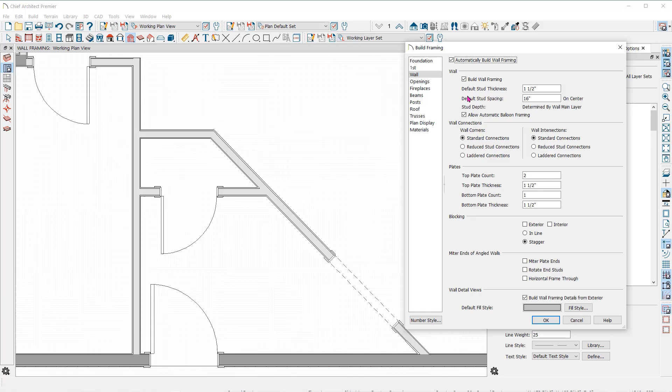I'll go ahead and click OK here, and you can see that Chief Architect has automatically framed all of my walls with preset defaults for how they are framed. But let's go back into the Build Framing tool. Notice here, when I hover over the tool in the toolbar, you will see Control-Shift-S in the parentheses. That indicates the hotkey that is set up for using the tool without having to go to the toolbar. I will be using this hotkey from now on instead of the tool in the toolbar to open the Build Framing dialog.

You have several choices here that control how each of the corners and intersections of the walls will be framed. Right now it is set to frame with standard connections, which provides for finishing nailing here at the outside corners and inside corners. If we click here on Reduced Stud Connections and click OK, it will produce corners or intersections composed of only 2 studs. If I click the Undo button, this is the standard connection, then Redo to see the reduced stud connections.

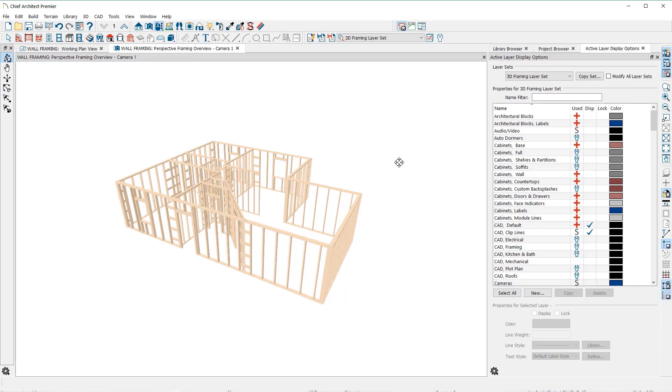If we use the laddered connections to add horizontal ladder blocking at the corners or intersections instead of vertical studs, you won't see the result of that in a floor plan view. So let's take a look at the framing overview. Here you can see the ladder blocking at each corner and intersection. Because there are separate settings for each, you can have your intersections framed differently than the corners.

When you first open a plan, all of the vertical walls will frame through the corners at the ends. You can change this by, again, going to the Build Wall Framing dialog. We'll change this back to Standard Connections. And here, under Miter Ends of Angled Walls, you can click on Horizontal Frame Through. This will affect all the walls, not just the angled walls. Now the horizontal walls frame through the intersection, and the vertical walls butt up against them.

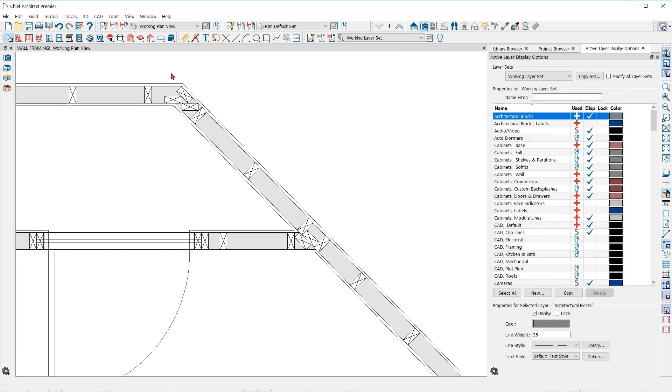For angled walls, you have a setting for miter plate ends and rotate end studs. The miter plate ends will miter the ends of the top and bottom plates, which again you will not see in the plan view. If this is unchecked, top and bottom plates will be butted together. Rotate end studs will rotate the studs closest to the miter ends to the angle of the miter, in this case a 45-degree angle. If unchecked, studs will remain perpendicular to the angled walls.

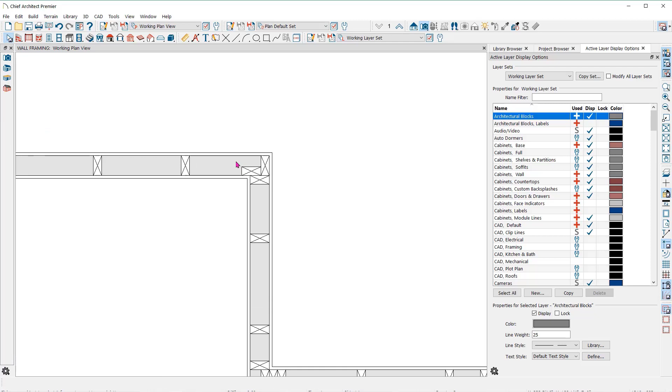Using the settings in the Build Wall dialog will establish defaults for how all of the walls will frame, but you can customize each wall individually to frame how you want it to. For instance, if I wanted to use a 4x6 post in this corner, I could manipulate each framing member by clicking on it, which at first will select the wall, then click on the Tab key to go to the next object. Now I have selected the stud, and I can delete, move, resize each stud individually.

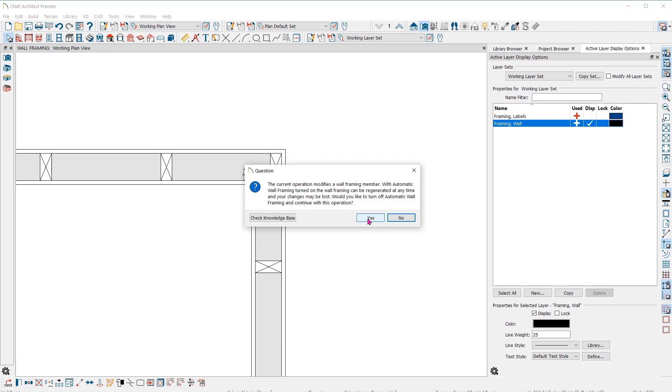When you manually edit wall framing, you will get a dialog that will let you know that the automatic wall framing tool is turned on, and modifying that framing will turn it off. I'll click Yes, and you can see that I have deleted one of the studs. Then I'll select the one in the corner, hit Tab, and use the edit handles to change the size. Now remember, when you reactivate the Automatic Build Wall tool, it will delete this custom framing and replace it with default framing.

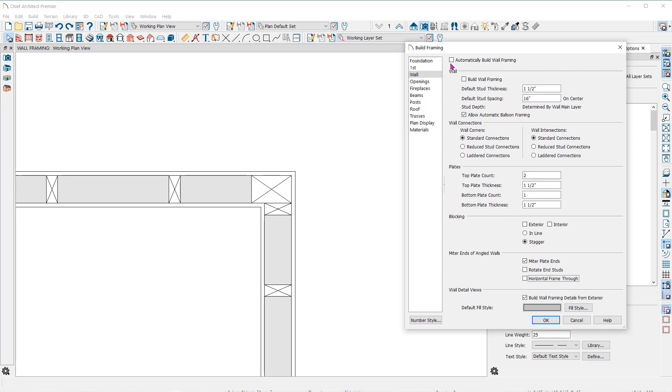Another way to edit the framing for the corners and intersections in individual walls is to use the Edit Wall Layer Intersections tool. When you click on a wall, you will find the Edit Wall Layer Intersections tool here in the Edit toolbar at the bottom of your screen. Click on this tool and then zoom in close so that you can easily see the edit handles for changing the framing. A wall layer intersection edit handle is located at the midpoint of each wall layer.

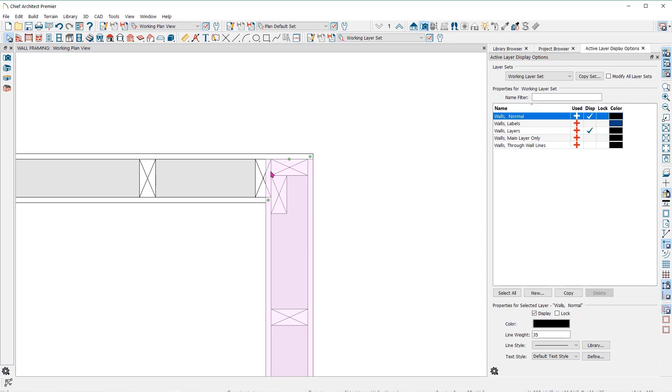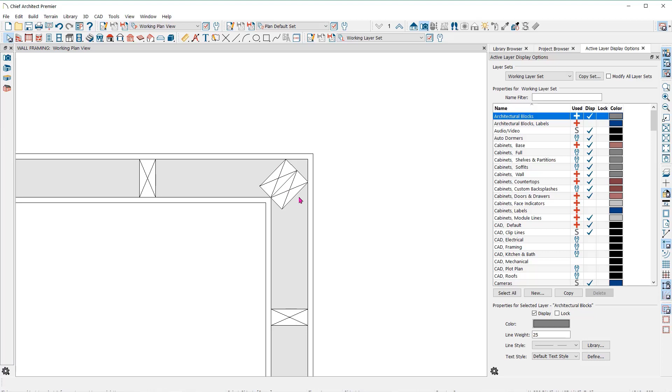Click and drag a wall layer intersection handle either towards or away from the opposite edge of the intersecting wall. If I drag this edit handle to this side, this wall will frame through, and this one will butt up against it. If I drag it to this side, this one will go through, and this one will butt up against it. If I drag it to the miter position right in the middle, notice that both walls stop at the butting position. This is because here in the Build Framing dialog, I have turned off the setting for Rotate End Studs. When I check this box, notice that both walls have a stud in the miter position in the corner of the wall. This is especially important for angled walls.

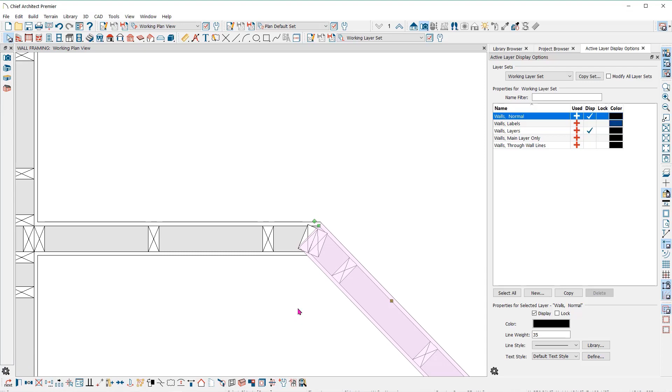If I select this angled wall and use the Edit Wall Layer Intersections tool in the Edit toolbar, I will move the Framing Layer edit handle to the miter position, and you can see that it will frame with two studs mitered together. When you are finished, click the Main Edit Mode button here at the bottom left corner, or press the Escape key. And remember that this is editing an individual wall, so that it will no longer follow some of the defaults set up in the Build Framing dialog. There are many ways to control and edit wall framing as well as other framing components in your Chief Architect plan.